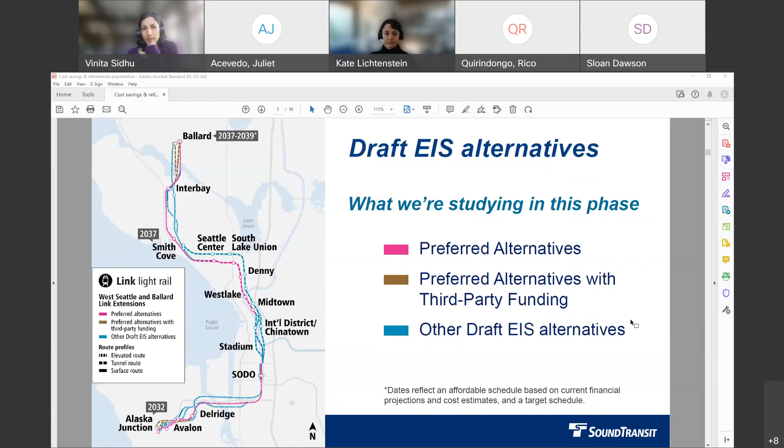So as I mentioned, we've been doing a lot of engagement. This is just a snapshot of the engagement process during the draft EIS.

We've had a number of public meetings and community advisory group meetings. We've completed 5 series of those, one group per segment, so we have 4 community advisory groups that have met pretty much every month as part of the draft EIS. We briefed them this past month in April on the draft EIS and cost savings and refinements work. And then we have one more meeting series of the community advisory group in May, anticipating to consolidate feedback to help report into the board process.

We are looking at some board workshops. I think this may be moved to May now, to look at additional work on the cost savings and draft EIS work, and consolidating the public comments, and looking at June for the board action to confirm or modify the preferred alternative.

Just a quick snapshot of engagement we've done. In addition to those community advisory groups, we've been tracking comments as we've received them, and as of April 8th, so it's probably more than this by now, we've received 820 plus comments. As mentioned, we've had a number of public meetings.

We're also out there doing other community briefings and workshops. We have our online open house engaging more than 10,000 visitors. We've been doing property owner meetings and really just a whole bunch of other stuff. So just wanted to mention that. All right, so that's just a quick intro.

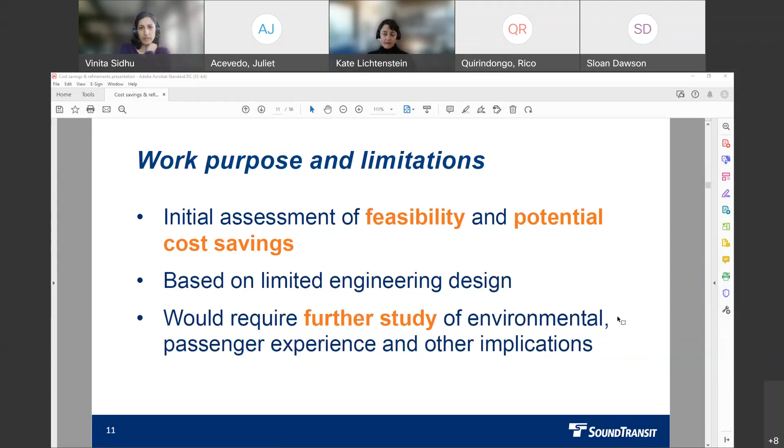And so what we're essentially asking is, these are initial ideas, and what do you think of them further? So we'll discuss two ideas today. As I mentioned, there's sort of cost savings specifically that could help address the affordability gap. But as we were doing the cost savings work, we also identified some ideas that may not have direct cost savings based on the way that was calculated, but they could potentially address other risks or opportunities.

Really, these are things that we've learned as we've studied the project more, as we've done the draft EIS analysis and coordinated with our agency and stakeholder community partners. We've learned more about the project, and so it's a good opportunity to identify other potential refinements that could also be looked at as part of this process.

And again, because these are just initial ideas and they're not part of the draft EIS, what we're asking and seeking feedback on is whether to study any of these ideas further. We're not seeking board direction at this time to adopt these ideas necessarily as part of the confirm or modify the preferred alternative action. So I just want to make sure that's clear. Really just, is it worth studying these ideas further?

Okay, so I'll walk through the concepts in a little bit more detail. I'll start with the cost savings and then go on to other refinements. So starting with the cost savings concepts.

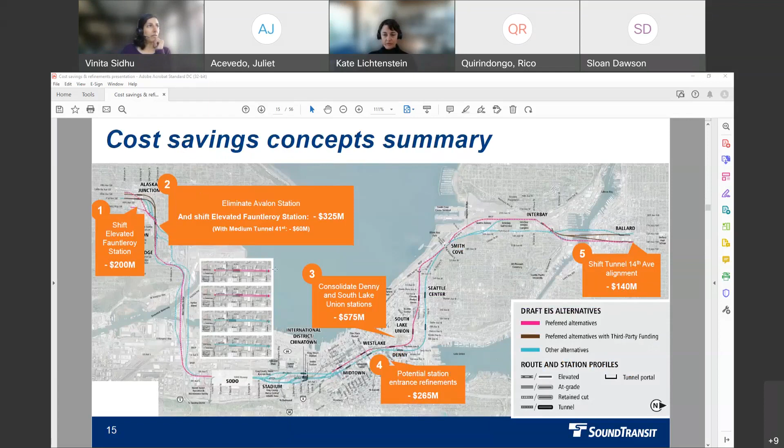In the West Seattle Junction segment, the cost savings idea here is shift elevated Fauntleroy station, and this relates to the elevated Fauntleroy alternative shown here in pink.

The background of this cost savings idea has to do with, in pink, where the draft EIS alternative is, and it does affect a more recent multifamily development. So this looks at shifting that alignment slightly to the east in order to avoid that development. That could also avoid about 300 displacements and has a potential cost savings of about 200 million.

I also want to note, below, how the cost savings are being expressed here. They're in 2019 dollars, which is consistent with the cost estimate in the draft EIS. And again, this is based on conceptual design and subject to change.

Okay, the second cost savings concept has to do with a bigger idea. I want to note we have some smaller ideas, like the previous shift, and some larger ideas which have more to do with consolidating or eliminating stations. This is one of those ideas.

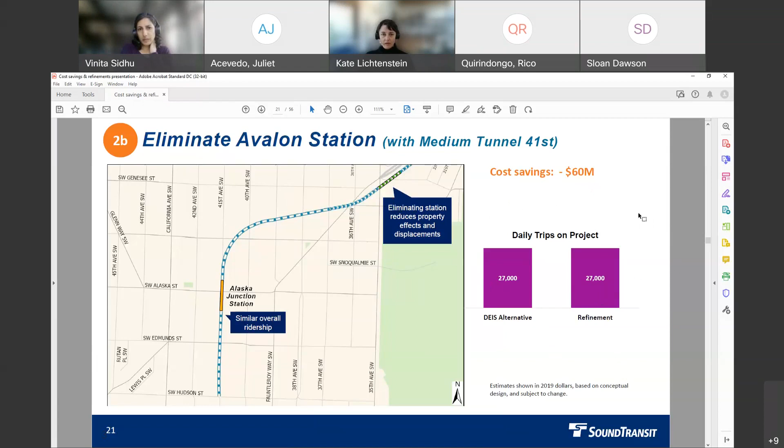All right, those are the two ideas in West Seattle. So in downtown, we've got a couple ideas. Here is again a larger idea, if you will: consolidate Denny and South Lake Union stations.

One reason, or potential trade-off, to think about this is that it avoids some of the streetcar impacts seen as part of the Denny station at Westlake. We've noted here that from this potential station location at Dexter and Denny, you could connect into either of the Seattle Center stations, at Republican or Mercer.

You would potentially see some lower overall ridership on the light rail line, although a lot of those riders would likely take other forms of transit. So overall transit ridership would not necessarily be negatively affected, but on the project, there could be about a 10,000 decrease in daily trips.

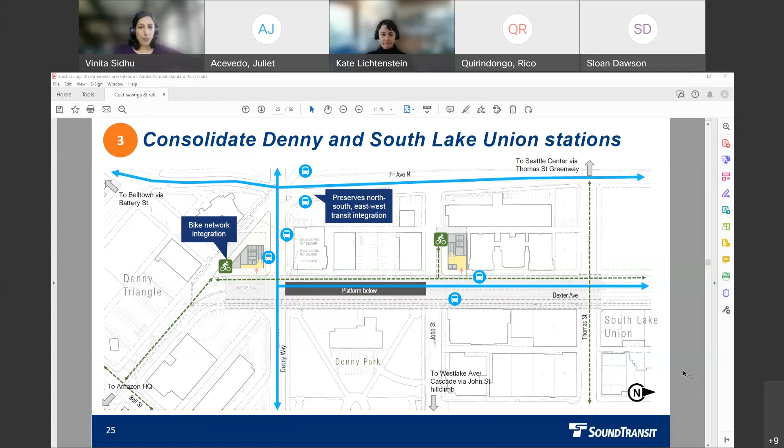Okay, very good. Thank you.

Another set of ideas for cost savings in the downtown area have to do with potential refinements to station entrances. I'll talk about a couple ideas that pertain to the Midtown, Westlake, and Denny stations next. These are perhaps not quite as big ideas as station consolidation, but more refinements to how the entrances are located within the urban fabric. Really, these are focused on avoiding some of the risks or costs related to property acquisition, because real estate is such a big driver of costs in the downtown area and other parts of the project too.

So here at Midtown, one of the concepts relates to that. This is looking at the corner of Madison and 4th, avoiding one of the potential properties needed for the project, and instead looking at siting entrances in the right-of-way. Here's a concept of an entrance within a sidewalk rather than on private property. This would be a potential cost savings of about 20 million.

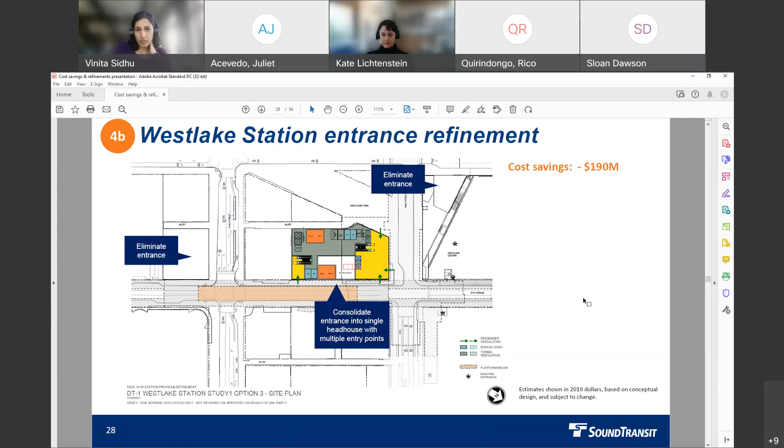Thanks, Sloan. And then the third downtown entrance refinement idea, at Denny Station. Again, this is looking at avoiding a property and instead siting the entry in the Lenora Street right of way. Just noting here, this idea would be a permanent full closure of the street.

And Sloan, any more you want to add on the entrances in the right of way ideas? Just briefly, with this and the other entrances, they would be located offset from the actual station box, so there would still be the need for some below grade lateral movement from these access points, sort of a mezzanine or concourse level. This doesn't necessarily assume the depth of the station itself and the need for that lateral movement to get to vertical circulation down to the platform changes, but it does represent a significant cost savings as well as a really interesting urban design opportunity.

Thanks. And I should have noted that the cost savings of this is 55 million, as you can see on the screen.

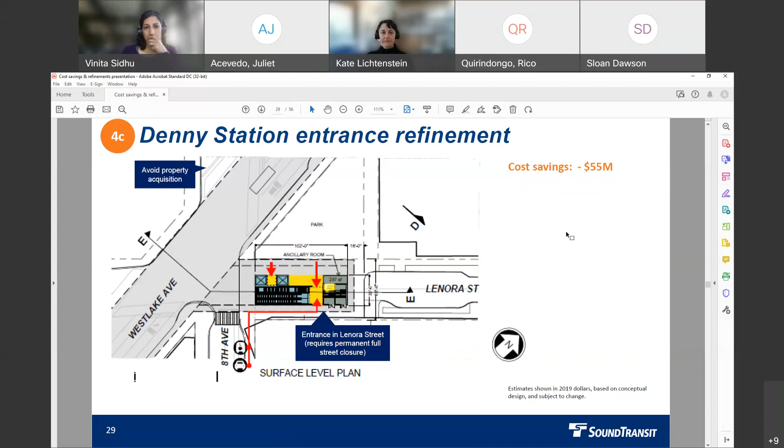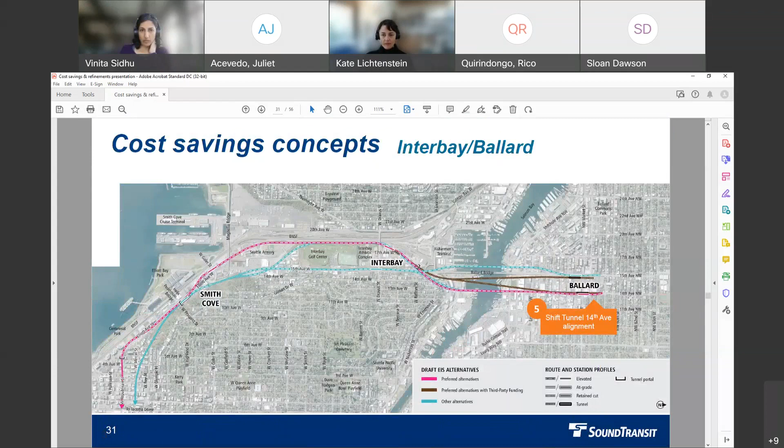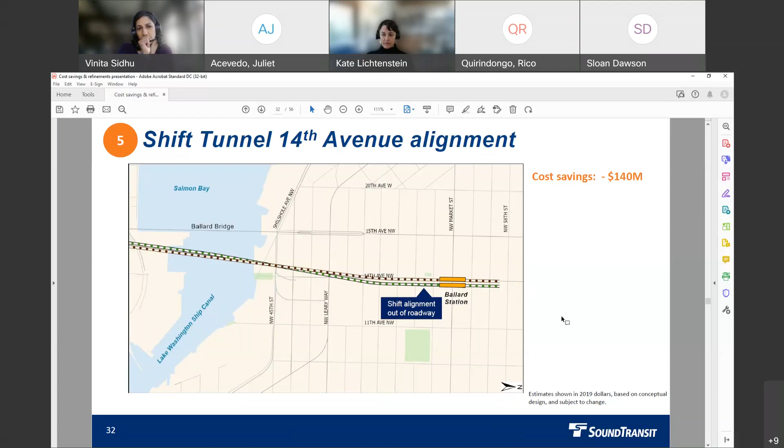Okay, so then in Interbay Ballard we have one idea. This is related to the Ballard station, looks at shifting the 14th Ave tunnel alignment. And this again is not a huge shift. In brown, you see the preferred alternative with third-party funding to 14th, and in green is the proposed shift. Really this is looking at shifting the alignment out of the roadway, with a potential cost savings of 140 million.

Just looking a little closer at this, currently the station guideway, alignment, and underground station box are located in 14th. Here you're just looking at shifting that out of the roadway and into property, some of which was already anticipated to be needed for construction of the project and for the station entrances. So the entrances would remain on the east side of 14th. You could save additional costs if you eliminate this entrance on the west side of 14th, and so this cost savings includes the savings of eliminating an entrance and shifting out of the roadway.

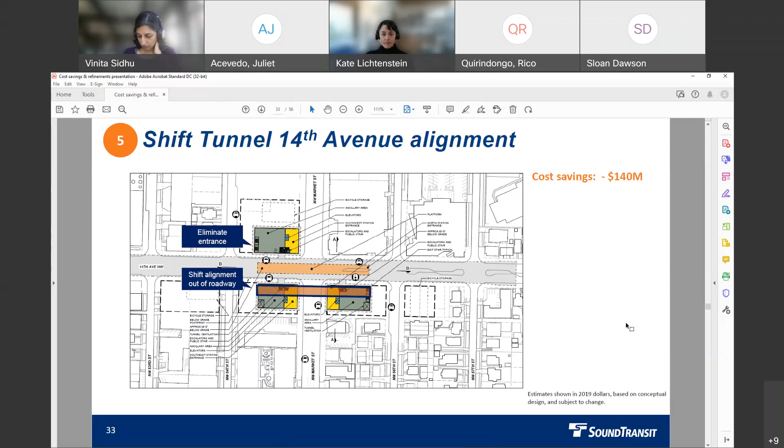Okay, so those are the cost savings ideas. I'll now talk about the other refinement ideas. Again, these are ideas that may not particularly have cost savings as we've estimated it, but could have potential savings, if you will, or effects on risks or opportunities. There's about 6 ideas across the project that I'll talk about, and again I'll start in West Seattle and move through downtown over to Interbay Ballard.

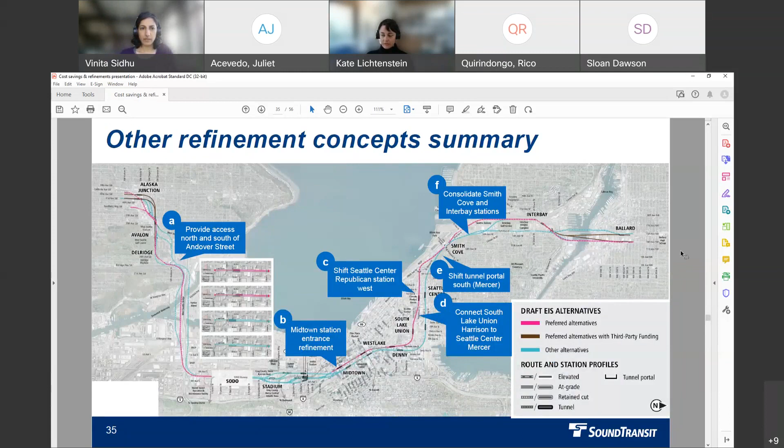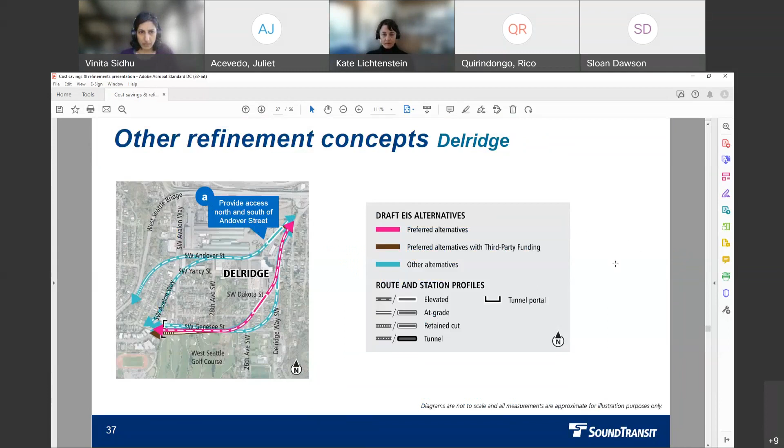The first idea is in the Delridge segment. This looks at the Andover to Medium tunnel alternative, providing access north and south of Andover Street. I guess this connects to either of these alternatives here, accessing north and south of Andover for the purpose of transit integration and community access.

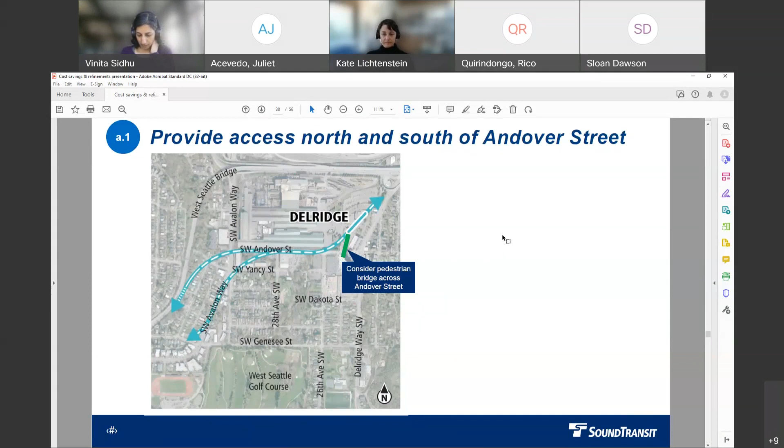There's a couple different ways you might consider doing that. One way would be adding a pedestrian bridge across Andover that connects directly into the station. Another way you might look at expanding that access across Andover is actually shifting the alignment and the station south slightly. So in blue is the draft EIS alternative, and in green you're looking at a potential shift of this alternative slightly south.

One potential trade-off of shifting, you might need to close this roadway, 32nd, but this could also allow you to lower the guideway and station if you were able to do that.

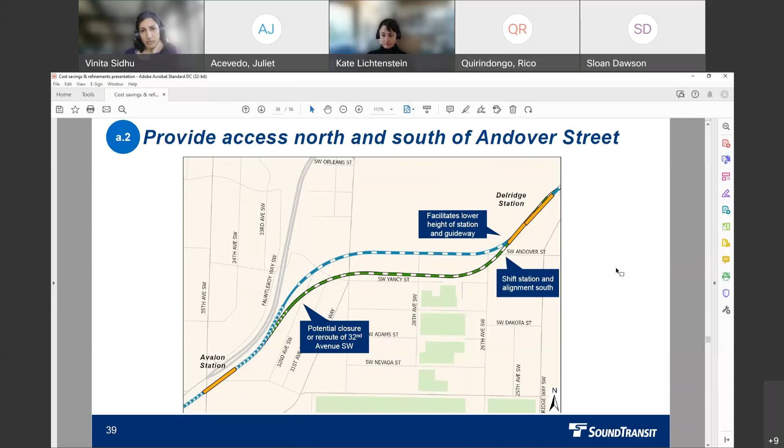In downtown, a couple refinement ideas. Again, another station entrance refinement. Again, this could reduce property risk here at the corner of 5th and Columbia, and again looks at locating an entrance in the sidewalk on Columbia.

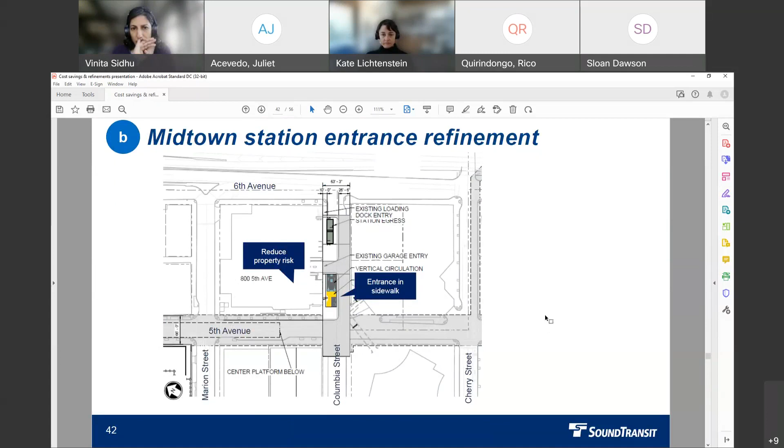There's a couple ideas in the Seattle Center area. These really are in response to concerns we've had about construction of the stations in and around Seattle Center. The first idea is to shift Seattle Center Republican Station to the west. Currently the Seattle Center Station on Republican is located on the Seattle Center campus. This looks at shifting it slightly to the west in order to move away from some of those more direct impacts.

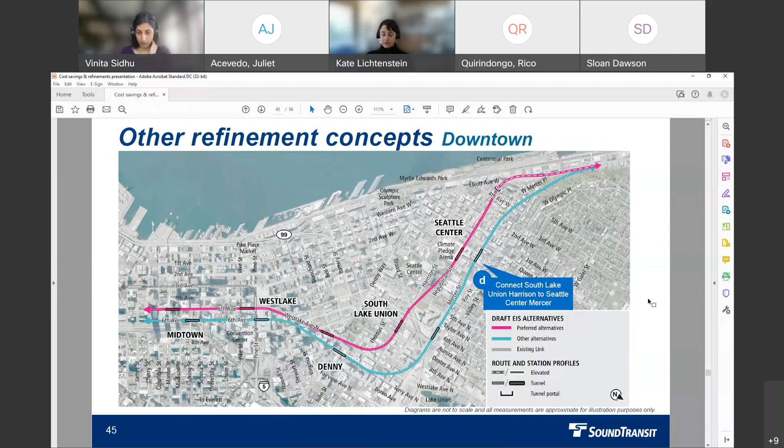And another idea that has been discussed is a mix and match, if you will, connecting South Lake Union Harrison to Seattle Center Mercer Station. Here we're just noting and showing that that can work, with a rough sketch of that connection.

In South Interbay, there's a couple refinement ideas, and these are centered around some of the risks and challenges of coming out of the tunnel portal in this South Interbay area. It's a steep slope, there's the Queen Anne Greenbelt, there's Elliott and 15th as a major freight route, and concerns about traffic impacts.

A lot of these refinement ideas are looking at trying to reduce some of those impacts and avoid some of those risks. This first one we call Shift Tunnel Portal South, to kind of the Mercer area.

Just looking at that a little bit more closely: currently we have two tunnel portals in the draft EIS. There's one here in pink on the pink alignment over at Republican. There's also another tunnel portal that comes from the blue alignment from Mercer here at Prospect Street. So this really is focusing on refining the location of that portal that currently comes out of Prospect.

We looked at a couple ideas of whether you could avoid some of the hillside and steep slope effects, both from the portal and from the alignment that currently goes behind the Magnolia Bridge and Galer ramps here. We did identify that you could potentially lessen some of those steep slope effects if you shift the tunnel portal south and shift the station north of the Magnolia Bridge.

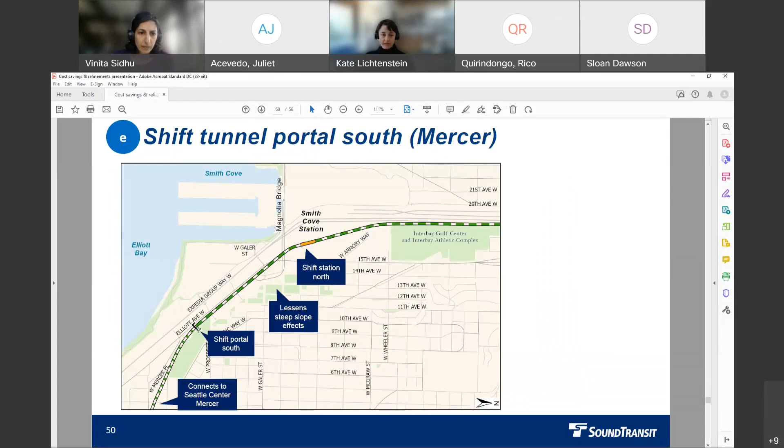Looking at this concept on its own, you would shift the tunnel portal south, connecting to the Mercer alignment here. This could go straight over Galer and across Magnolia instead of behind the ramps. You could potentially lessen some of those steep slope effects in this area, but you still have some of those effects, as well as potential park effects from the portal location a little bit further south. And that would mean a slightly shifted station to the north, north of Magnolia Bridge.

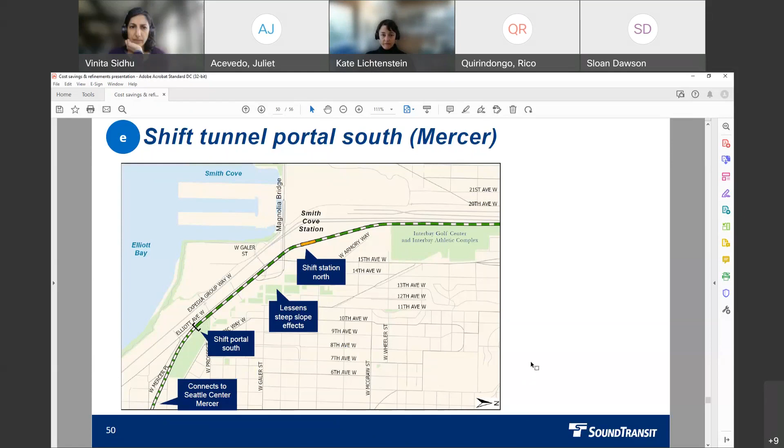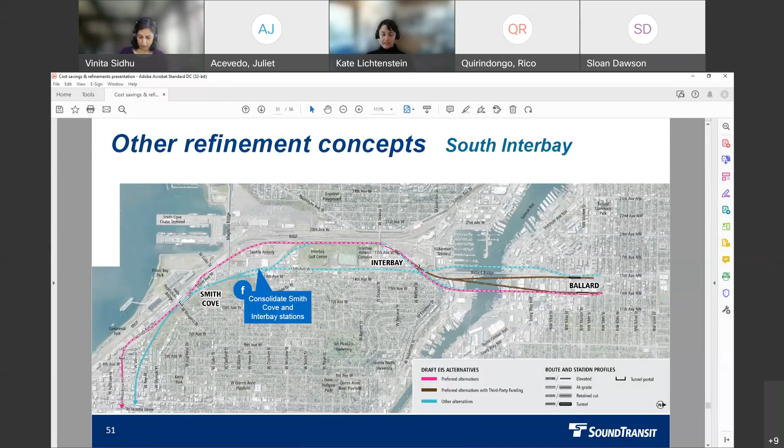And then finally, another one of the station consolidation concepts. Again, this came from trying to look at ways to avoid some of those impacts. We looked at that more slight shift, and this looks at really a newer idea of trying to avoid some of those impacts.

So rather than having portals here on the hillside side of the South Interbay area, it would actually stay in a tunnel, go underneath Elliott and 15th and underneath all of this infrastructure, and stay in a tunnel until you're on the west side of 15th, sort of in the area just east of the Seattle Armory. You would then continue in a retained cut for a short period and then re-enter a tunnel toward Ballard.

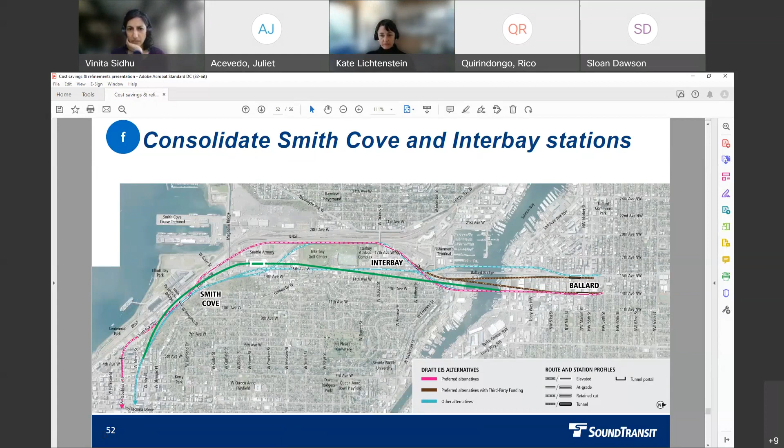Just zooming in on that again for a minute: the dotted line represents this tunnel alignment going underneath the roadway and underneath that infrastructure, sort of daylighting in that area west of 15th, and then re-entering a tunnel to Ballard, with a station somewhere in this area, sort of east of the Armory property.

So a couple of things to note about this potential refinement. By staying in a tunnel and continuing on to the west side of 15th, you really avoid much more directly those parks, greenbelt, and steep slope effects. You also avoid those traffic effects on Elliott that you'd see from the other tunnel portal, or the alignment that comes from that other tunnel portal along Elliott from Republican.

You would see a potential minor reduction in overall ridership. We've shown that here - about a 2,000 decrease in daily trips on the project.

This would also potentially help avoid some emerging issues or risks and concerns we've identified as we've continued the study through this draft EIS phase, which has to do with the Interbay Golf Center, which is a former landfill. Rather than constructing along the west side of that landfill, which the current preferred alternative with third-party funding would do, you would actually avoid that. You would be on the east side of that area and going in a tunnel just to the east of it. And again, in Interbay, you have a lot of coordination with the railroad, the BNSF Railway, and other Interbay properties that we've learned may be redeveloped. So this avoids some of those properties in the Interbay area.

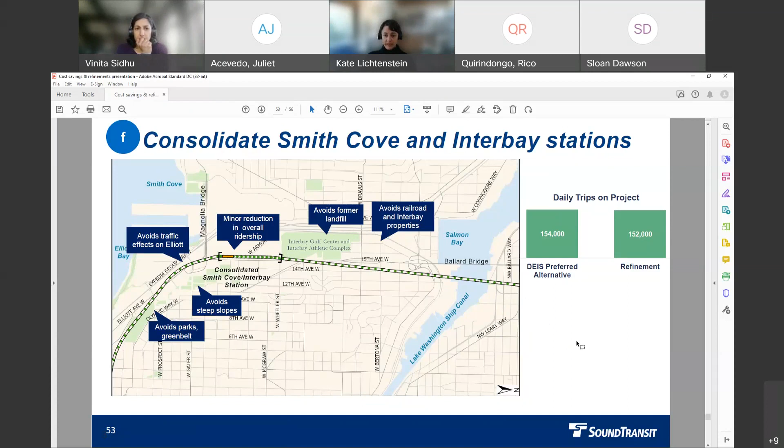All right. And then we've done another sort of initial test, if you will, of potential urban design access and integration ideas along with this consolidated station location. So I'd ask Sloan to just describe that a little bit.

Sure, thanks Kate. So a few things to note about this.

We have sort of two station areas that are now into one again with the consolidated concept. This moves Smith Cove slightly to the north, so it's moving further away from Expedia, which is a main destination, really kind of the main reason for the Smith Cove station.

But it does move the station close to areas with significant development potential, specifically the Armory site and some of the current commercial and industrial properties right around it. So this really goes big on a vision of thinking about this as a cohesive development area that already has a public development authority the state created to look at future uses on that property, acknowledging that much of the thinking to date is focused on industrial uses leaning into the future of industrial use. So really thinking about that as a job center.

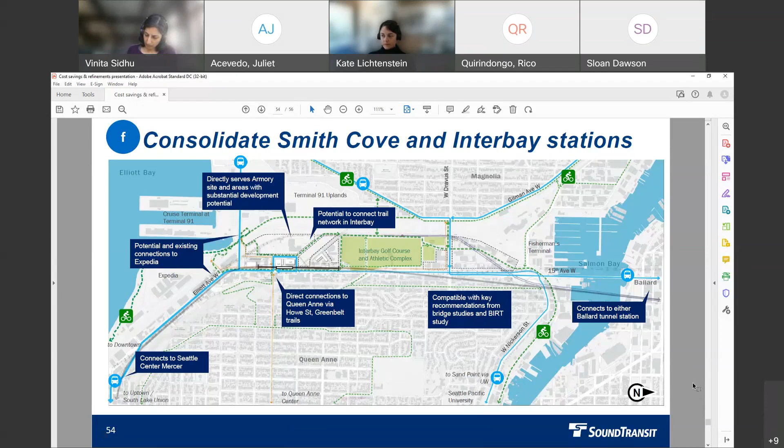Great, thanks, Sloan. All right, well again, just wanted to note where we are in the process. I think that's my whole presentation, so I will stop there and turn it back to you. Yeah, Vinita, turn it back to you.

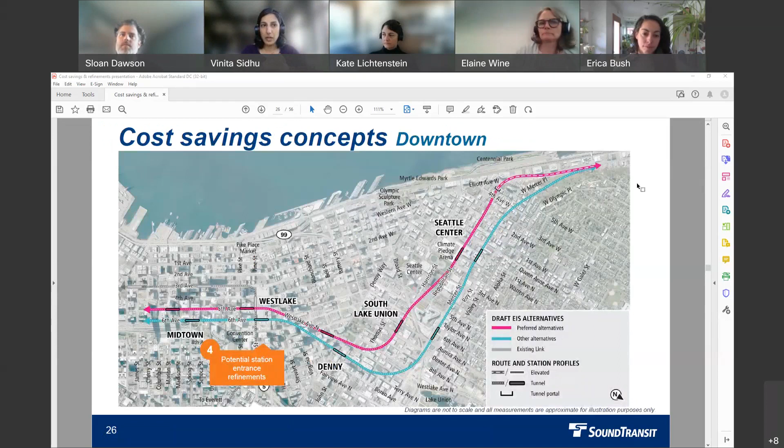And then I guess, with the proposals of consolidating stations, when you bring up the Denny and South Lake Union stations, they're not really that many blocks apart. And while there's a lot of potential riders and maybe some who don't want to walk that extra three blocks, it does seem like there's not a huge gap in where you can get out and access transit.

This is my observation at a high level. It did look like there were some interesting opportunities about this new proposed station location and its adjacency to Denny Park. But when you look at the farther out areas where populations aren't as dense, but those are neighborhoods that will change more over time, I have more concerns about what the long-term impact would be of not having those additional stations.

So I don't know that I have enough information to give you an opinion on that, but I think that's something that is certainly very relevant to understand from long-term planning, what would be the impact of the loss of those stations. And then I don't have any other specific questions. I definitely think there's a number of things here that are worth studying, especially if there could be some other net benefit - a long-term win, this ends up being more efficient for cost, and it also works really well because we're going to have less impact on this neighborhood, or this new station location is better for XYZ. So that would be the way I hope you're looking at it, and it sounds like that's being considered. Thanks.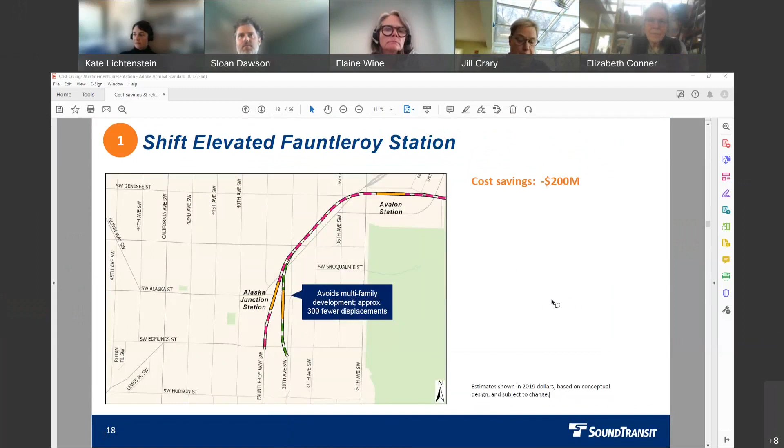But where you'd land in terms of the elimination, again, I guess you're right. I'd have to go back and look to see if it also pertains to the further west alternative, but it probably does.

You might, yeah. And then in terms of, okay go ahead. No, I'm sorry, go ahead. No, you go ahead, I just didn't want to ask you - you don't need to analyze that right this minute, it's just a thought I had.

In terms of moving forward, if this is something you really want people to look at, I think you link the moving of this station potentially from as far west as California back to what is this, 38th Avenue, and then you link it with the tunnel, and then with the lower guideway into Delridge, and now you start to have a package that addresses a whole bunch of concerns we've heard. Right now we're seeing it in these early stages as little pieces, and we have to mentally put it together as this bigger package. But I think as a next step, packaging some of these things into a cohesive story that might actually be compelling and a reasonable compromise could be one of the next steps.

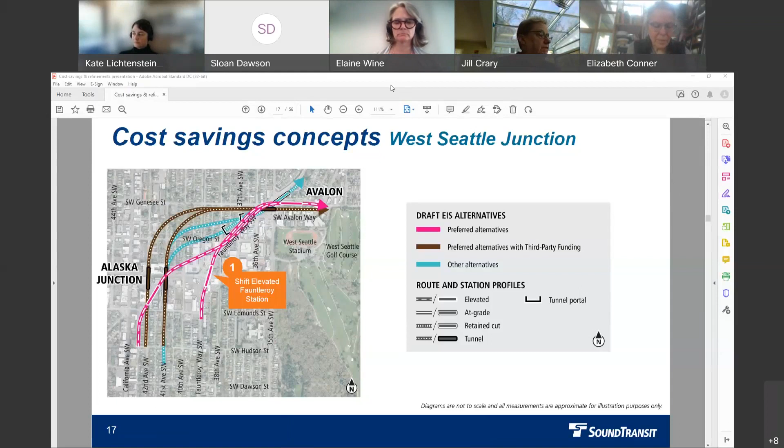I think what I have is page 20, but you probably have a bigger number, shows the Denny South Lake Union consolidation and the station on Dexter and the park and Denny. That's a relatively compelling relocation of both stations and alignment, because it straightens out the alignment as well. I don't know if your cost savings include that alignment straightening, but to me that looked like a more complete thought.

And then you could add to that moving the Seattle Center Station further west, and do that study of the difference between stations. I think you'd find, again from an equity perspective, that your spacing becomes pretty reasonable with the elimination of the station. So it's just a thought about what one of the next looks at would be.

The only other thing I want to say is yes, I think you should definitely study the station entrances in the right of way. As Vinita said, other cities make this happen, and I think it behooves us as a city to look at that.

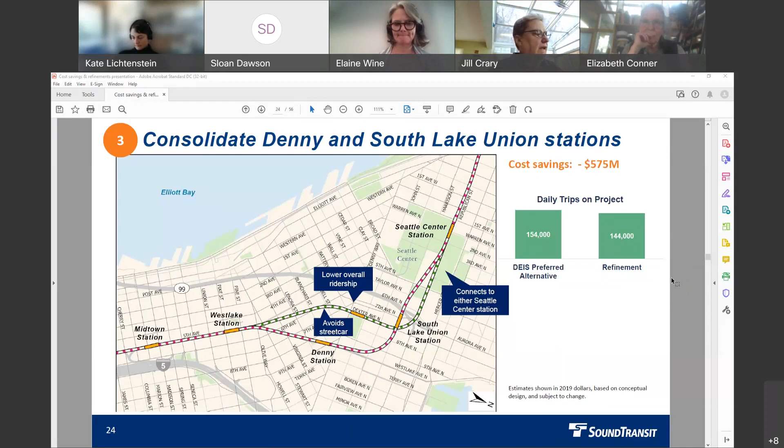I think more information is needed about the Interbay Smith Cove thing. That was the one where I really didn't see how you got the ridership numbers and how buses from residential Magnolia factor in. It's one thing to talk about how it's going to affect potential job things, but there's also a residential piece that I think is missing from what we saw today. And that's it for me.

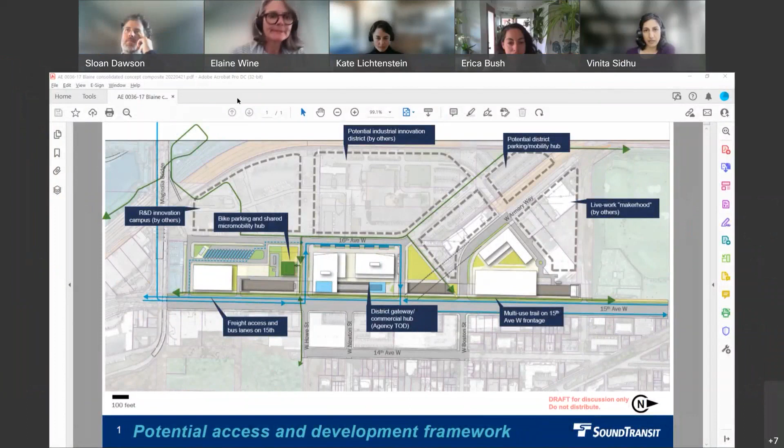As part of our study of those two consolidation concepts, we showed an image of the Denny SLU one, but didn't really show something at Smith Cove, partially because there are some larger questions around engineering and such. But I do want to quickly show you what we've been thinking, to help illustrate how this would work.

One big difference over our existing proposal is that buses coming from Magnolia, largely using the existing Magnolia Bridge, would currently turn right and essentially drop curbside at the preferred alternative station location. At the further south ones, they would continue running south and probably drop on the west side of Elliott, requiring a crossing. With this concept, the buses would be turning left, which would trigger a need for signal upgrades and the like, but provide a dedicated transit pathway into the station site and allow zones inbound and outbound to be consolidated, with a right-out circulation pattern to go southbound, or a left turn to go north.

As part of the city's BIRT study, they were already thinking about freight access and bus lanes on 15th. So this would assume that, to really optimize those movements and service patterns from both south and north, as well as from Magnolia, those lanes would be made available to help facilitate bus movements here.

Another critical dimension of the program is bus layover. If we consolidate, we have a larger number of bus layovers, so this concept is thinking about how the layovers could be programmed on Port of Seattle property. We'd be able to work with the port and city to optimize this, and then of course have the station right next to the Armory site.